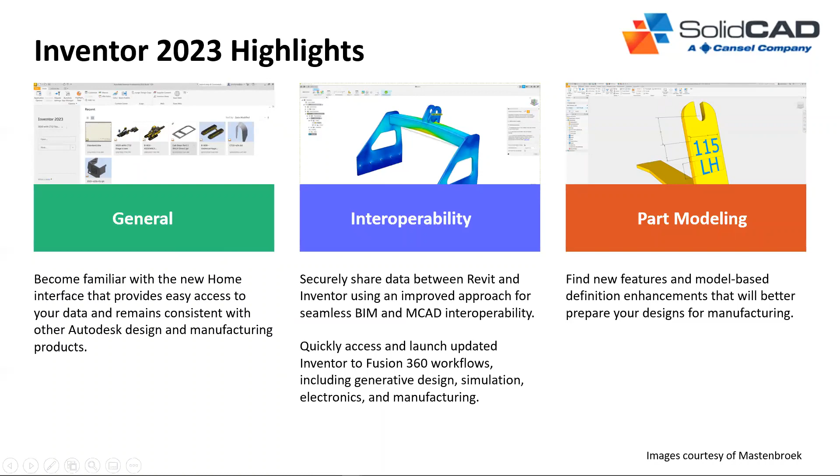Also inside the assembly modeling, you have a new, interesting tool: performance. It's always the goal of Autodesk Inventor to increase performance with each version, and that's a great help in 2023 too. I will end the Inventor side with documentation.

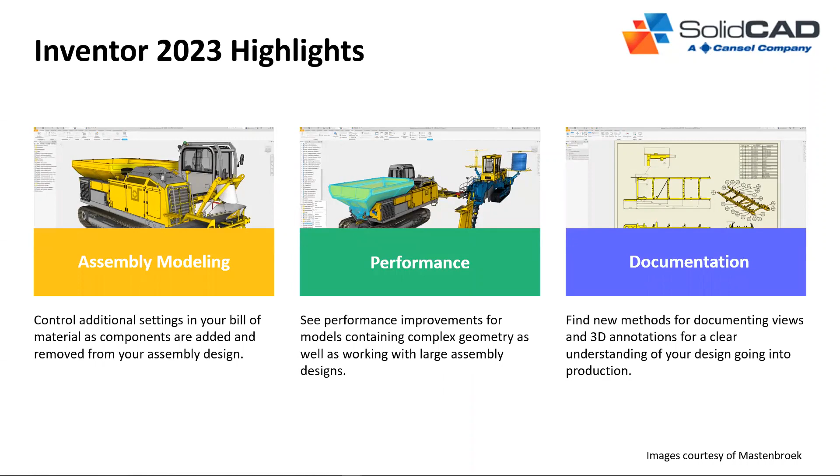In 2D drawings, you have a new tool and feature inside Inventor 2023. Let's go to the general enhancements. First, with 2023 you have a different Home tab, similar but divided into different sections. At the bottom left you see What's New and also tutorials, and the display will be different. It's just a brand new display.

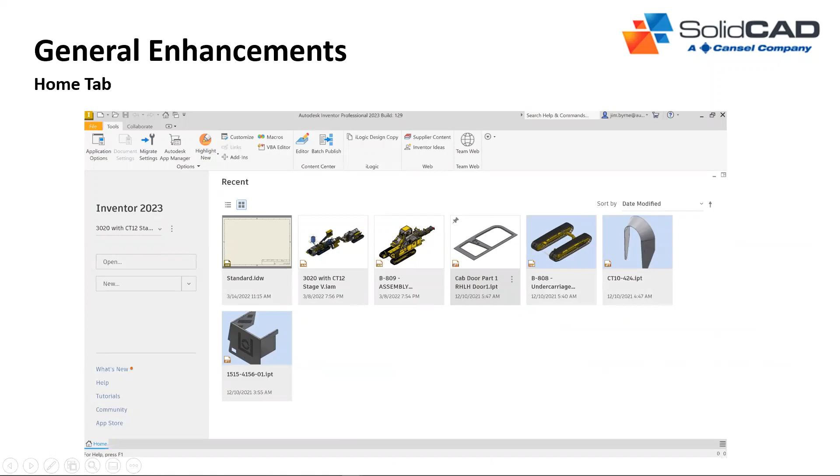One interesting thing inside the general enhancements with Inventor is the Shift and middle mouse button. In the previous version, you had new possibilities to configure your middle mouse button with the Alt key, and now you add the Shift key to configure this.

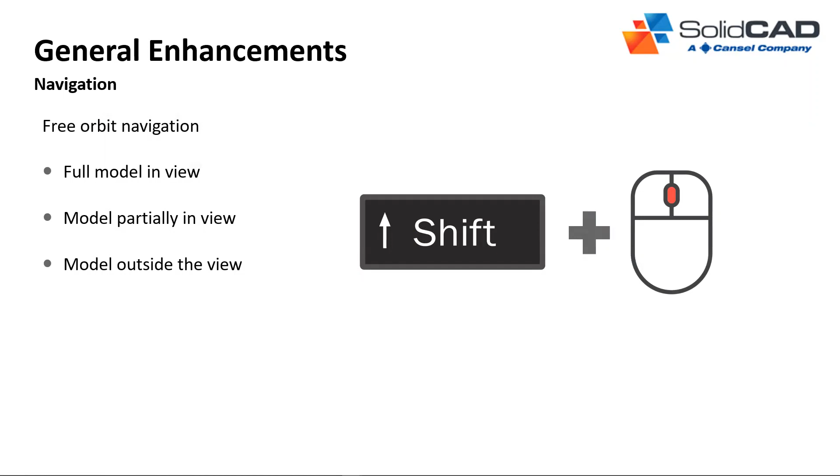Also a general enhancement with iLogic. If you are a user of iLogic, it's interesting that all external rules, and also global forms that are external too, now have access to add a new button inside your ribbon. So in Inventor customization, it's now easier to select an external iLogic rule or iLogic form to create a push button inside Inventor, which is interesting to add to your toolbar.

Also, if you use multi-value parameters inside Inventor, it's now possible to change the order — not just A to Z, but custom, manually changing the order of the parameter list. This is also interesting when you use it inside an iLogic form. New feature in 2023.

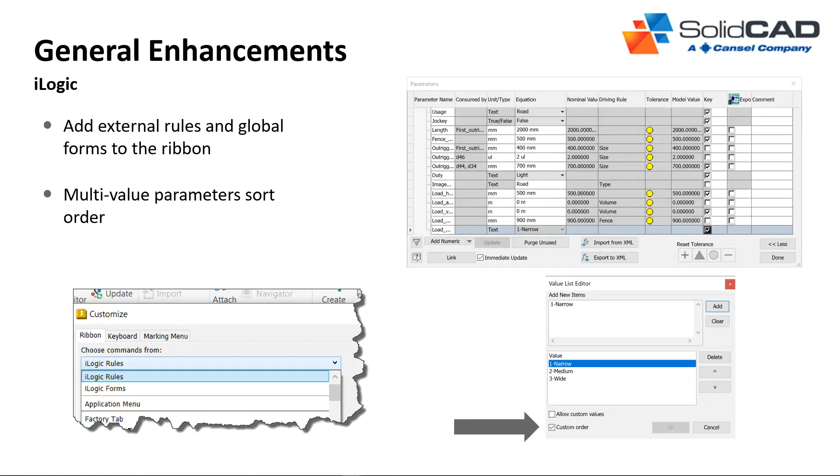Inside the general enhancements, if you have a mid or higher level graphic card, you'll be able to enable GPU ray tracing. This is new inside Inventor — instead of using your CPU, it uses the GPU, the graphics card processor. It's in pre-release in 2023. If your graphic card supports this feature, you'll be able to enable and try it.

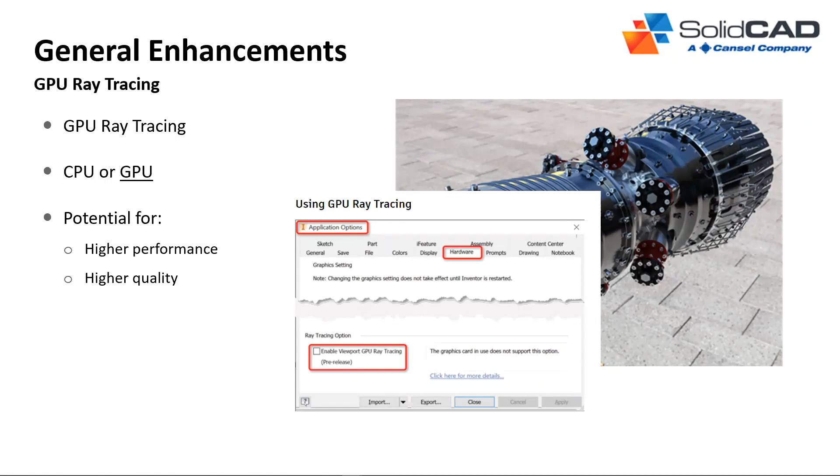So with different renderings, and also inside Inventor Studio, you'll have an improvement with the GPU if your graphic card supports this. It's pre-release for now, but you could try this.

Interoperability with different Autodesk platforms — I'll start first with Revit. Since 2021 and 2022, you could insert a Revit file inside Inventor. The problem is, hey, I received the file by email — you need an easier way to share than just sending the file.

With Revit, you now have access to the new Data Exchange cloud tool. So people using Revit can easily share a specific part of the building in the cloud, and update it as they add new sections or new walls. Inside Inventor, you'll be connected to that cloud file as a reference. If any change happens on the Revit side, it will be reflected inside Inventor without sending files back and forth.

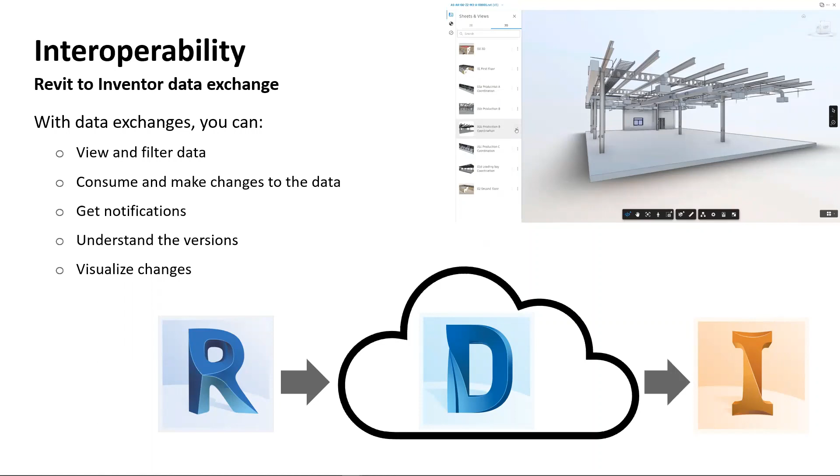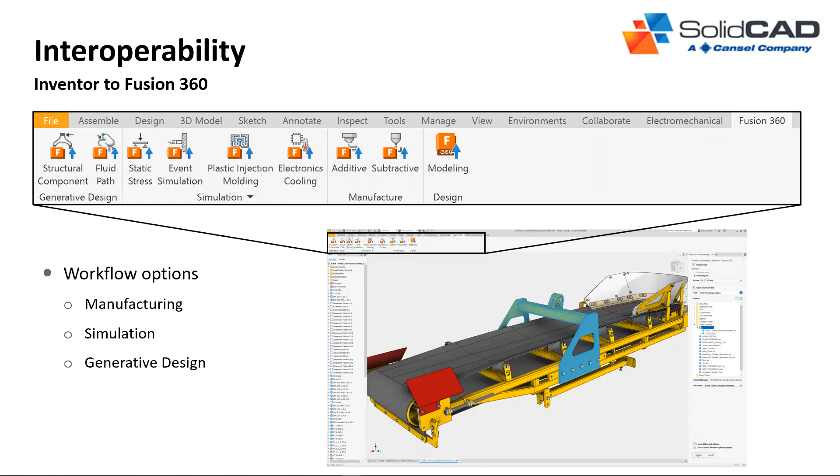Interesting, with Revit and also with Fusion. If you work with Inventor and have a collection, you also have access to the Fusion tool. Fusion is cloud-based software where you can easily use generative design, simulation, manufacturing, and design. So normally, if you need to create a simulation — for example, an event simulation like impact, or a stress analysis — it's now easier than ever to push this into the Fusion team without manually uploading the file. I'll show you a small video to explain this.

Also with Fusion, you could insert Fusion parts inside Inventor. Remember, inside Fusion you have access to other plugins developed by Autodesk, like circuit board design. You have the ability to create this inside Fusion, but importing it into Inventor sometimes means missing information. Now the mesh tool is available to import a Fusion design file inside Inventor, to be sure to retrieve all the info from the 3D model inside Inventor.

Also, interoperability, you could exchange different types of files. First, the new GLTF file, it's just an open source format, okay? And now it's available to export with Inventor. You have JT import export again, step file. The difference is just higher, it's more powerful now. If you import the step file, it's probably twice as fast now to import in 2023.

So STL export, and you also have the USDZ export. The USDZ is a tool for 3D reality. So if you export this package, it's also possible for other software to have a 3D reality view. It's also interesting to have batch export with the task scheduler inside Inventor, so you could massively export with GLTF, step file, or USDZ.

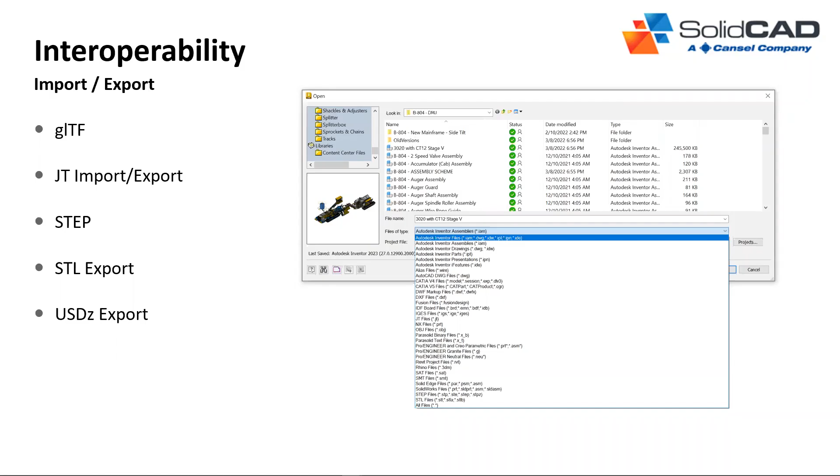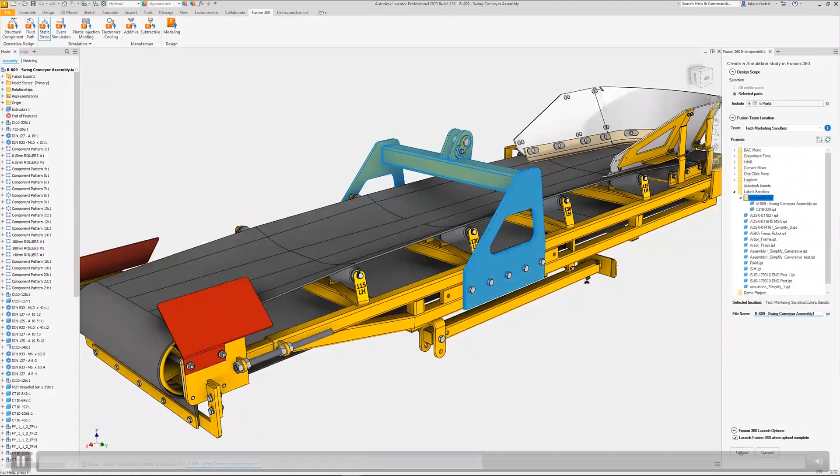So let me show you a small video with the new feature. You will see inside Inventor with the Fusion tool. First, if you open an assembly or a file or a part, you will be able to share this with the Fusion tab. So inside Inventor, you have access to the Fusion tool, and you have different options like simulation, manufacturer, and you will be able to share this directly from Inventor inside the new panel link with your Fusion Team Hub. You will be able to access your specific project just to share this info inside the cloud to process the information inside Fusion.

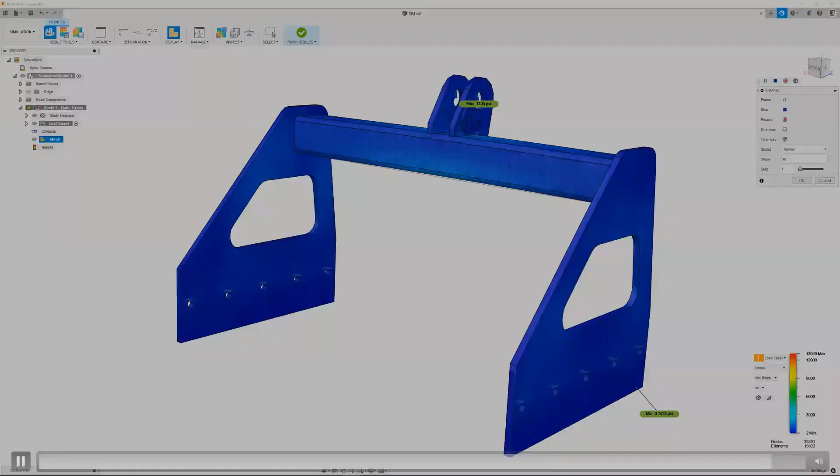So for example here, I would just push the sub-assembly, and inside Fusion I will be able to create this study like stress analysis and impact, and use the Fusion process and Fusion compute on the cloud just to be sure to have the correct result, and pretty faster because it uses the cloud process for Fusion. So it's interesting with Inventor to have access to this new panel.

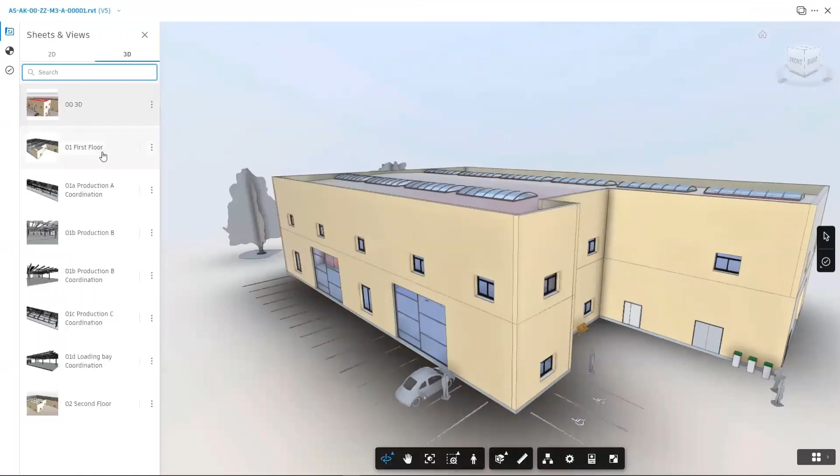And also for Revit, if you start with Revit and you need to share info, the Revit user will be able to specify what type of view they need to share. Normally they don't share the entire building, they will share a specific part. And now with the new data exchange, they will be able to directly share this on the cloud. And you could have inside Inventor the preview of this, and the data exchange is also embedded inside Inventor to insert the cloud file inside Inventor.

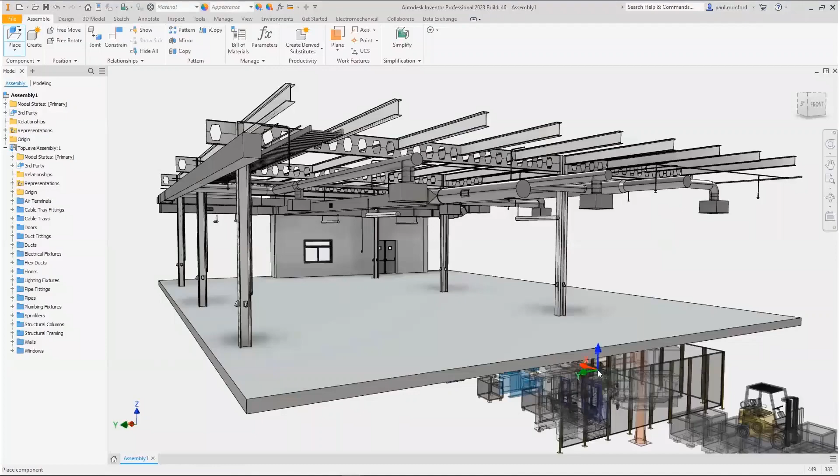So this file provided from the cloud, and this one will provide from my Vault or my site, and I will be able to collaborate with Revit and be sure to have one single file on the cloud to share.

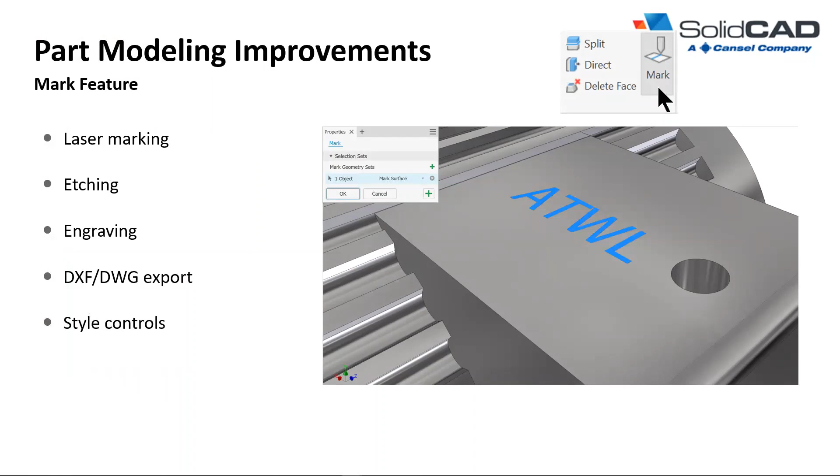So now the next topic is part modeling enhancements. You have some features, one is very interesting: the mark feature. In sheet metal mode, it's interesting because if you need to have a scribe inside your laser cut, and you need to export the scribe on a specific layer inside the DXF, it's now available in 2023. So the DXF export will include a specific layer for the mark tool. It's possible for any type of part, but personally I like this in sheet metal.

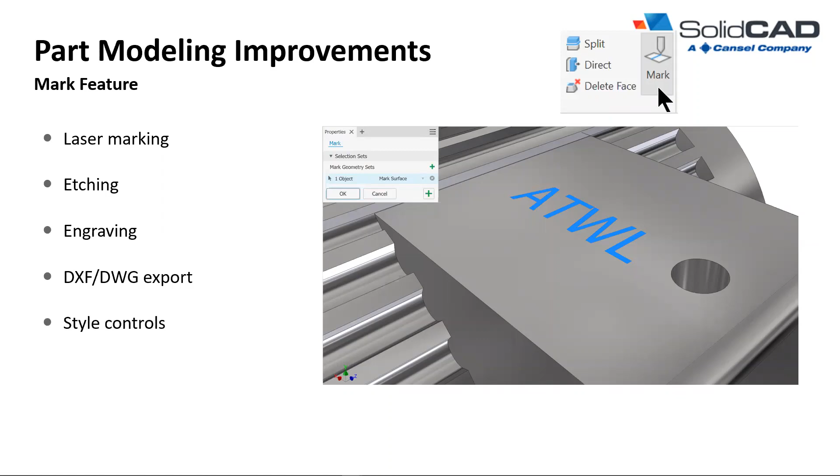You will see later also other tools linked with this new tool about properties, I will talk about later. Other improvement inside the part: if you have a broken projection like a sketch provided from another part, and you have a missing link, it's now easier for you to find and select the broken projection and delete this or break the link, and be sure to find this easier than the previous version.

Now, iProperties in text. Remember I talked just before about the marking tool. iProperties in text is interesting because you could integrate your iProperties from part number inside text. So if the part number, description, or custom parameters, you are able to insert this inside the text. And if you have a change, they will be able to change this. In the past, the only way was to use iLogic and push the iLogic text inside the parameters.

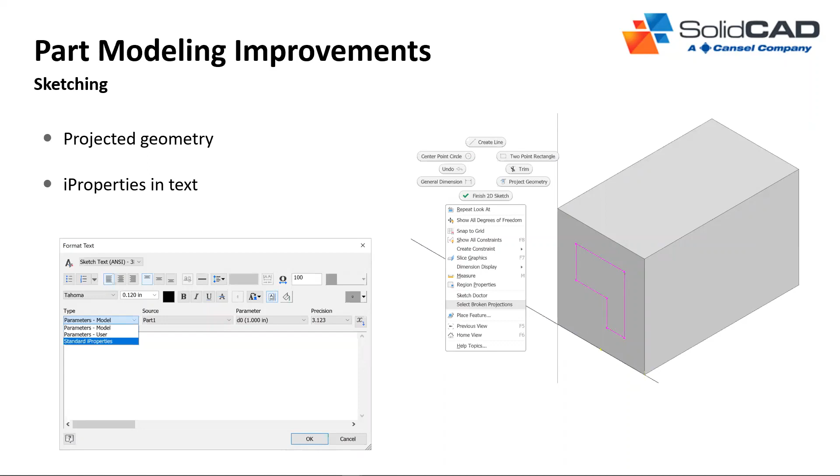It's just easier now. Again, inside the sheet metal part, it's interesting to know about the extended information. Probably you already saw this inside Inventor with the part, the standard part. You are able to see a better description of what is the face size and what is the thickness. It's now available in sheet metal mode too.

If you have a contour flange, an extrusion was only possible in two directions or middle, now it's possible with asymmetric extrusion for the contour flange. If you export the DXF file from the flat pattern, it's now possible to replace spline not by line, but by arcs. It's interesting because if you have an export with the DXF for your laser cut, it's easier, and arcs give a better job than multiple lines.

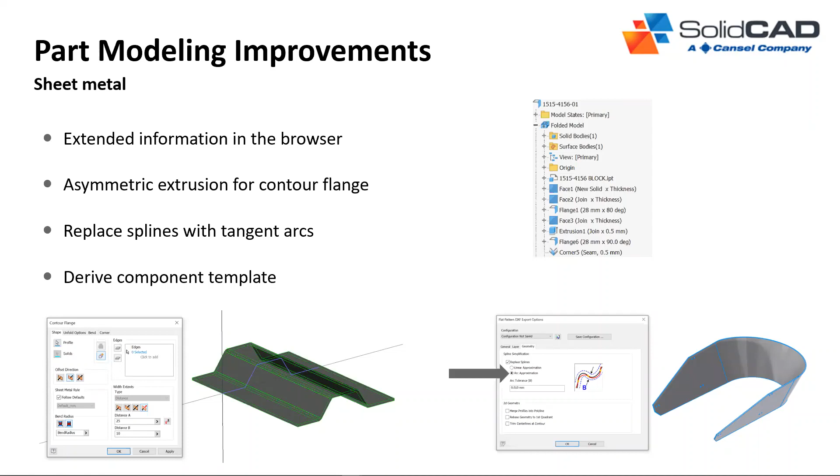Also, derive component is easier now to derive like a template. So if you create a sheet metal and need to reuse this for the same part, it's easier now to derive - like creating a mirror part inside an assembly, directly from the sheet metal, create a new one, and link it to the previous one.

Also inside the parts modeling improvement, when you create a fillet or also extrude, revolve, or each 3D feature now, you could easily access the tolerance tool. If you need to add tolerance during the extrusion, for example, it's available now. In the past, the only way was to enter the new parameters, go back in the tab and add tolerance. So it's now available directly on the screen.

The other tool is relationship with feature. You probably tried this in Inventor - right click and see where this feature is used. If you have a suppressed feature, it was just unavailable. Now suppress is also supported, to understand if you delete a feature, what is the impact of this feature. This tool existed for a long time, but it was just unavailable with suppress.

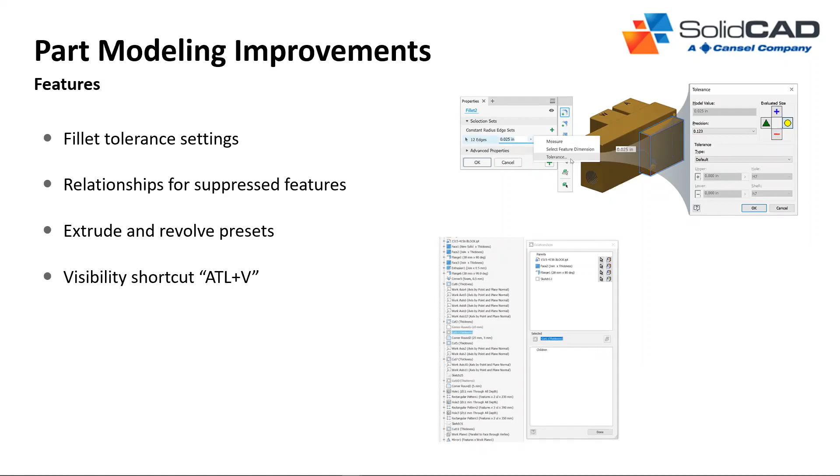You probably also use right-click to turn on or off your sketch, work plane, work axis, and also multi-solids. Now use Alt V instead - just click the sketch, Alt V turns it on or off, instead of right-click and turn on/off. So it's an interesting shortcut for you, ready to use with 2023.

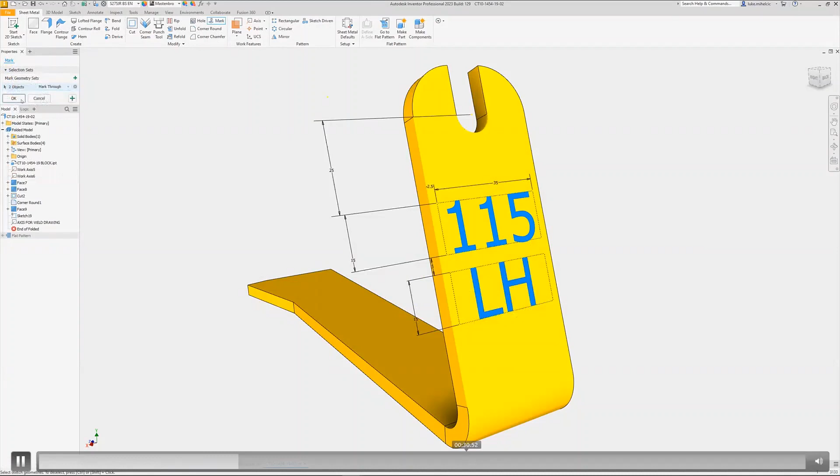So now, again, a small video just to explain the different tools inside the parts. First, if you open a part like a sheet metal and aren't used to the scribe or mark tool, you could use text or sketch, and you're able to use mark from one side or two sides at the same time.

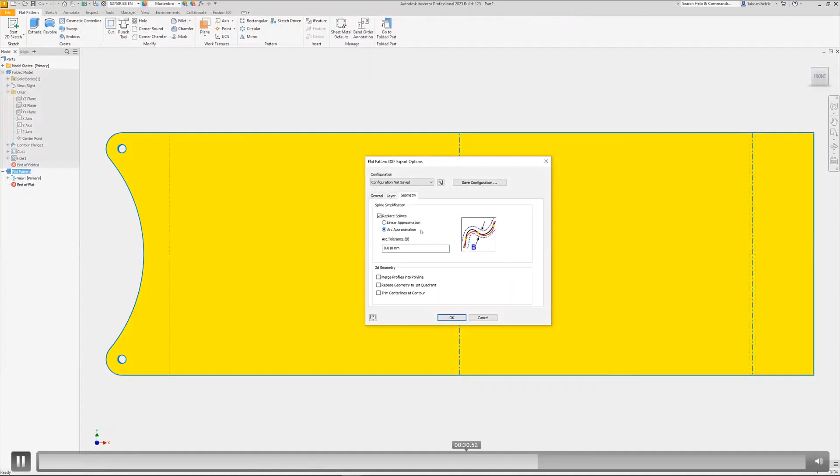Also, the extrusion could be asymmetric now for the contour flange tool. And if you have a flat pattern with DXF, now during the save you see the new arc approximation tool to be sure to resolve your spline with arc. If you create extrusion or fillets, you're able now to add directly inside the box your tolerance and also recover this tolerance inside a 3D annotation if needed. So just small tools, but very interesting in 2023.

Now the second part of Inventor is the assembly modeling enhancement. Inside the assembly, first I would talk about 2022. Remember, Autodesk changed - in the whole time when you suppress to create a new LOD, level of detail. Since 2022, you create a new model state that impacts the BOM. The problem with 2022 is if you use this, you suppress, and the quantity is 0.

Now with 2023, you have access to the small BOM settings tool and you could hide parts with 0. Suppress - please don't show this part. And also, when you suppress the part, the problem is because inside your structure or part only you have an item number.

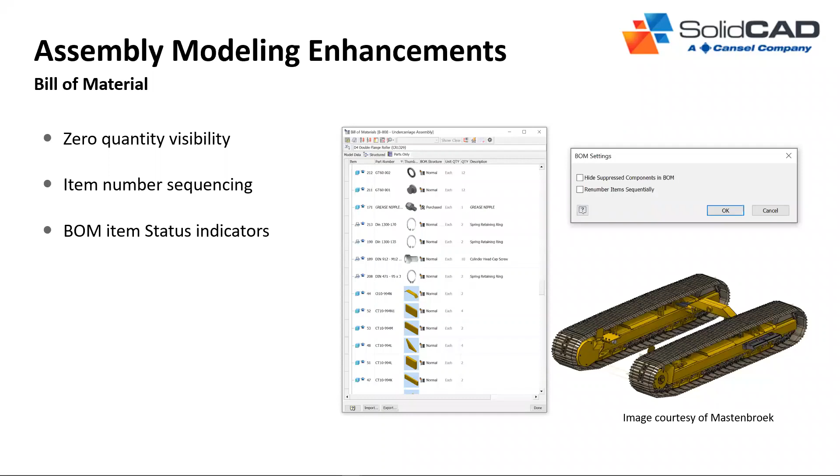The item number could now be renumbered instantly with this option. If you check renumber item sequentially, for example if you have items 1, 2, 3, 4, 5, and you suppress number 4, it becomes 1, 2, 3, 5 - now it's 1, 2, 3, 4. It's just interactive and easier than ever to manage your item number if you suppress a part. So interesting for the BOM, and also because you could use the model state to suppress different options.

And when you use not suppression, but if you remember the shrink wrap tool in the past, it's now the simplified tool. It's now just easier to right click and use the simplify. This is the whole shrink wrap to create a new model state linked with the new simplify, the old shrink wrap. It's already done in 2022, it's just easier in 2023.

The constraint options have a new tool. It's strange because you could create the constraint and suppress at the same time. Why?

Because you work inside an assembly and you know this is the level of detail, now the model state, and I just don't need this in this context. So you could create this, but suppress during the creation to be sure to not have this feature or constraint activated when you finish the job.

It's also possible inside the IPN, so the presentation file, to rename a storyboard. It's a little change, but in the past it was impossible to rename the storyboard. So very simple, but a new feature. And also if you use Publish to create a video from your IPN view, you can change the video frame rate. The video frame rate is new, to have better quality; if during 1 second I need 30 images, for example, it's possible.

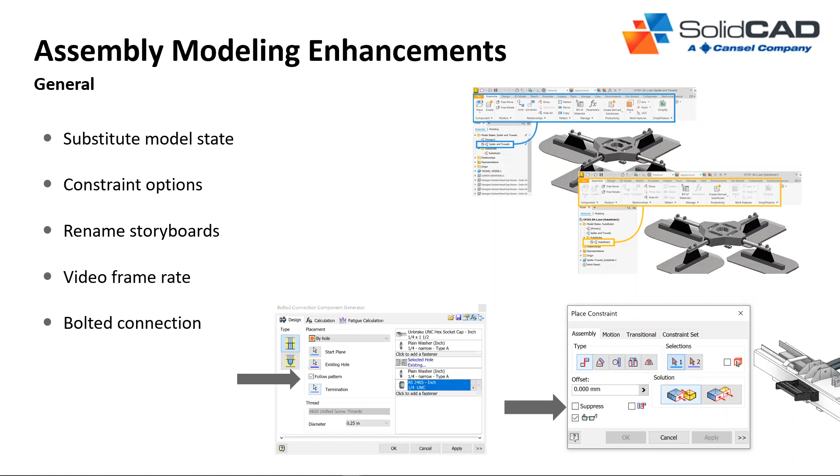The bolt connection also has a new tool. If you create a bolt connection, you could connect with the actual pattern inside the file. Now, if you check follow pattern during the bolt connection, it will follow the pattern, but also the sketch pattern, okay? If you tried this in the past with a sketch pattern, it was impossible to link this. It's now possible in 2023.

Inside the assembly, like the parts, it's easier to connect iProperties from different parts or different instances. So basically, if you create a note inside your assembly, like a 3D annotation, you would like to have specific info like a description from the part, or also an instance property, because you could link this inside the text and keep it updated. The goal is to keep the information in one place and distribute this info to all other tools like the text.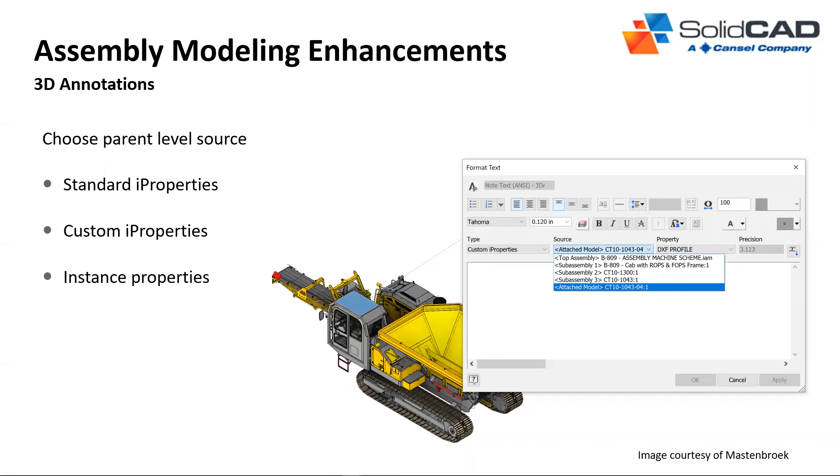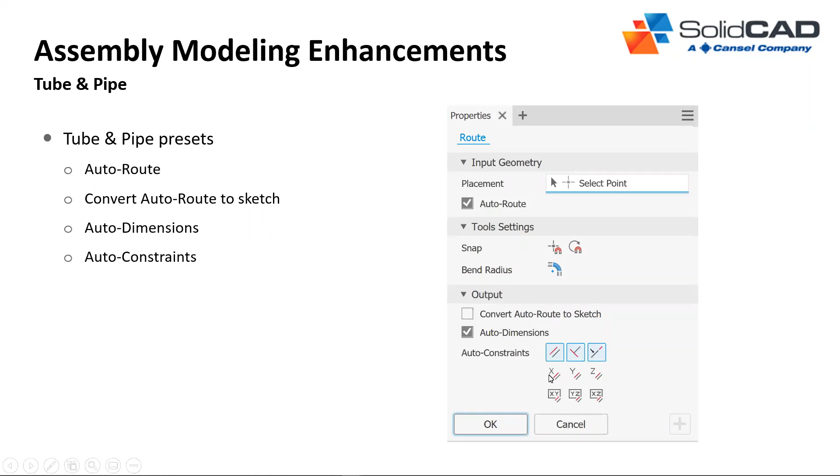Also, during the constraint, basically the three first were enabled, and when you go back inside your sketch, you see it's not parallel to XY or YZ. Now you could enable, during my sketch, all of these possibilities to be sure that all constraints will be applied at the same time.

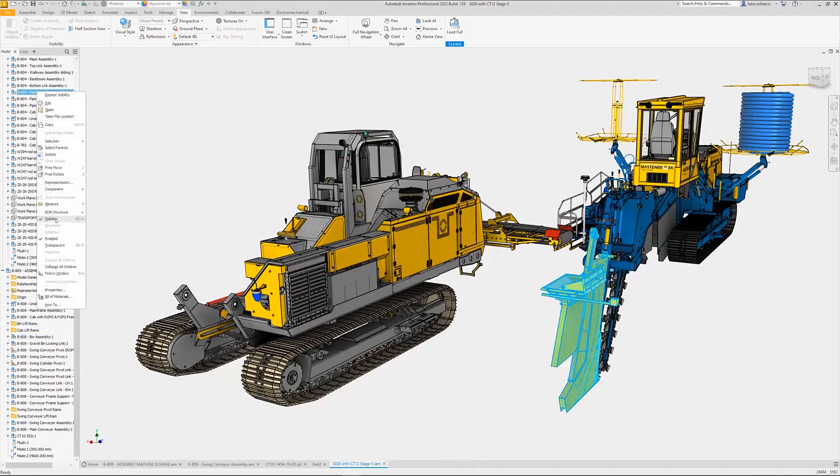Again, a small video just to explain some new features in assembly with Inventor 2023. First, if you go in express mode and turn visibility on and off, it's very fast in express mode, okay? It's very interesting, it's easier. Also, if you use the suppress command inside the BOM, and I don't need to show zero quantity, you access the BOM settings and suppress the zero quantity.

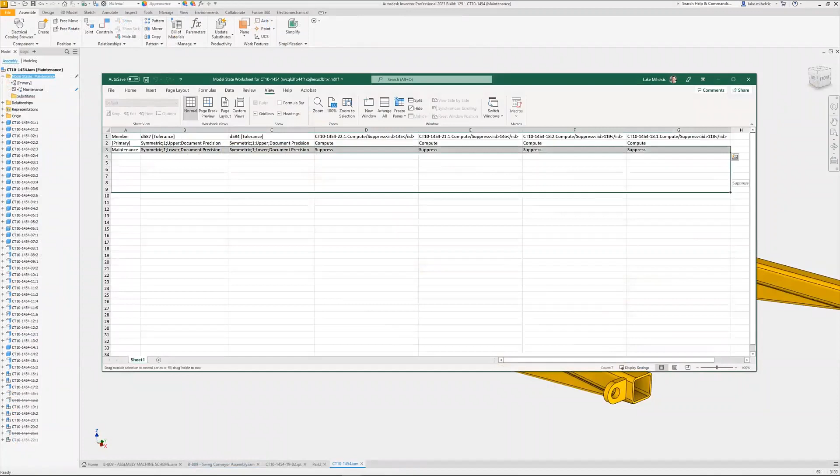Also, inside the spreadsheet of the model state, you are able to check the tolerances inside your part. So you could easily now drive the constraints and tolerances inside each level of detail, now model state. Different model state, different tolerance, you could drive the tolerance too. It's brand new in 2023.

So now the next is performance and improvement with Inventor. Now the express mode is just better than 2022. Each year, Inventor increases the performance of the software. You could have multiple thread cores on your CPU, so now they use more threads just to compute display. That's why Inventor with large assemblies is faster than 2022.

Okay. Also, if you use the punch tool feature inside sheet metal, if you have a lot of punch marks, okay, it's twice as fast inside Inventor than in 2022. So it's an improvement for the punch tool, but also for the display.

Also, Hugo, yeah, I think that punch tool feature, because we had a discussion a while ago about a customer that was using SolidWorks, and apparently it was a nightmare for them, for instance, for ventilation holes inside a cabinet, to have 40 by 50 holes in the sheet metal, and you were showing me something that was fantastic. So yeah, I believe that has been greatly enhanced. Yeah, sure.

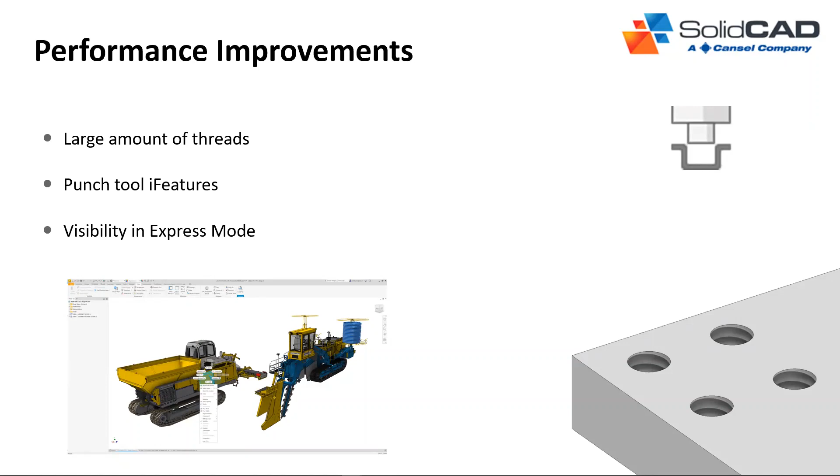Then the last slide for Inventor is documentation, the 2D drawings, okay? You know, when you use model state, you don't use positional representations. When you create drawings, it was possible to use an overlay view to have a superposition with different positions, okay? Now it's available with model state. If you create a model state, it could be used also for a part, for example with a different length of the part. You could use an overlay view to just overlay different model states, like the positional view inside Inventor.

Also, the edit detail. If you create a detail like a square or circle, I don't know why, but in the previous version you needed to go in the browser, right-click, go in the options, and try to change this. Now it's just double-click on the detail view. That's it. You access this box, and you are able to switch to square instead of circle, change the cutout shape and add the connection line. All is easier in 2023.

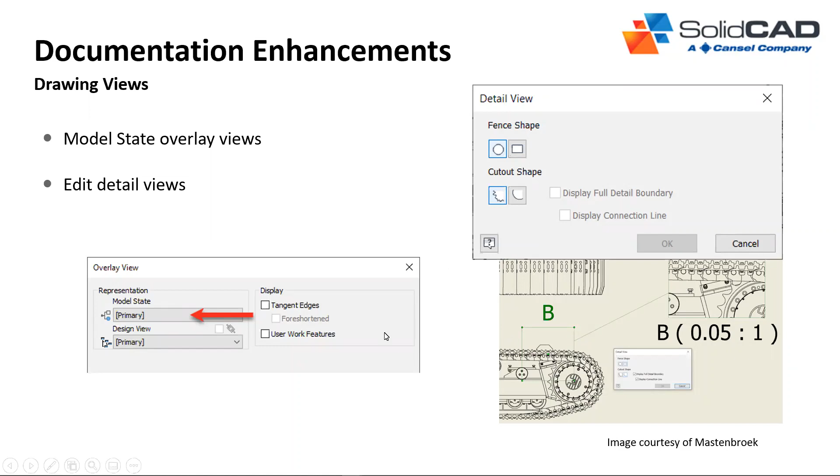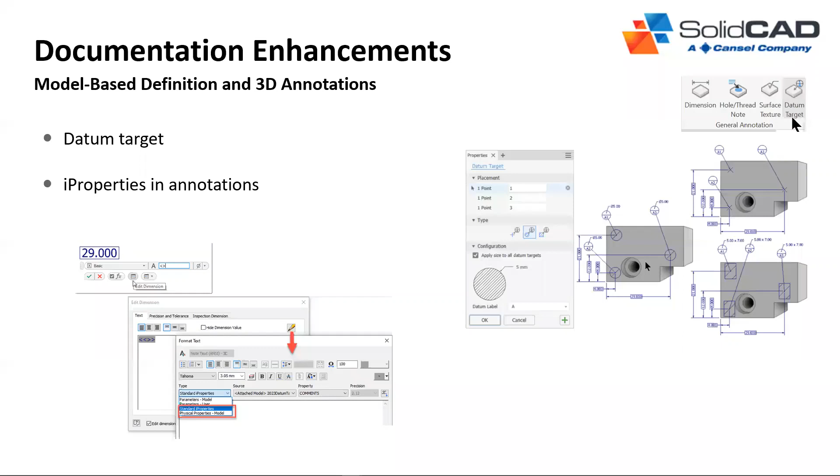Also, if you create a datum target, if you create 3D annotation, remember, iProperties are now back in text, so you could link your iProperties inside the text, inside the 3D annotations. Best way to centralize your information, always in your iProperties, okay? So it's brand new in 2023, and also datum target uses 3 different types of shape now. It's easier also to make a link with different features.

And also for the weld annotation, you know, you have a style library with the weld. Now there are new options inside the weld, you have a new symbol, okay? You have the new ISO 2553-2019, it's now available. You have some new ISO models, and Inventor upgraded the possibilities of the welding symbol, and also has a new feature like enforce to be automatic, fixed left or fixed right. You could enforce the right or left side for your welding annotation now. Okay.

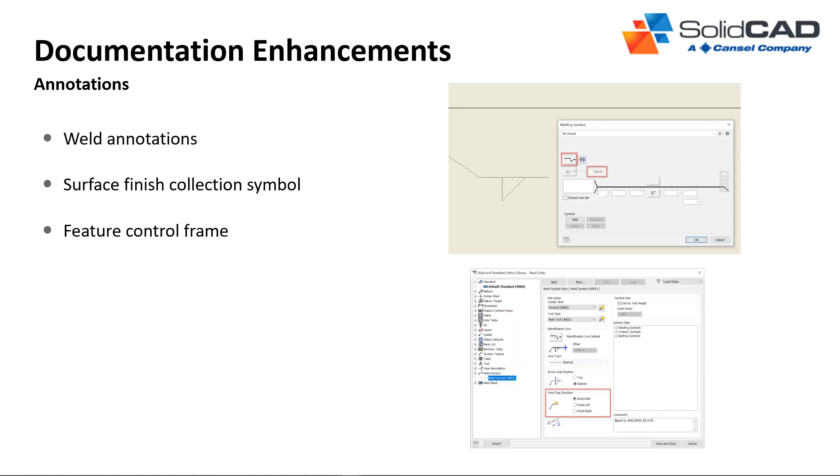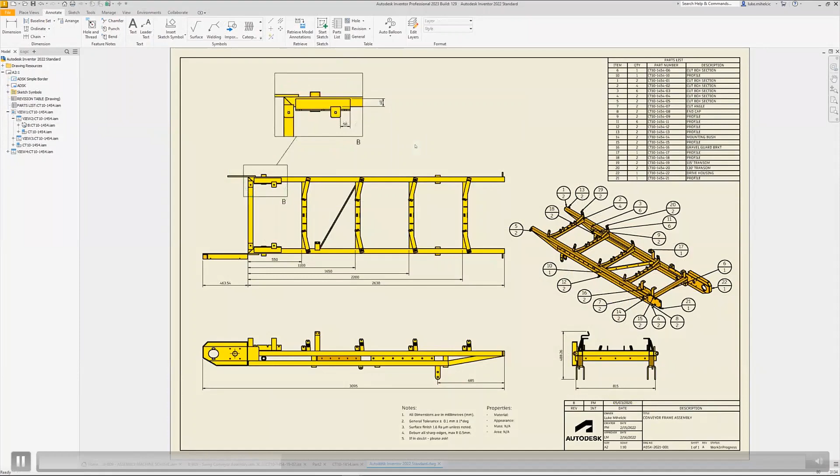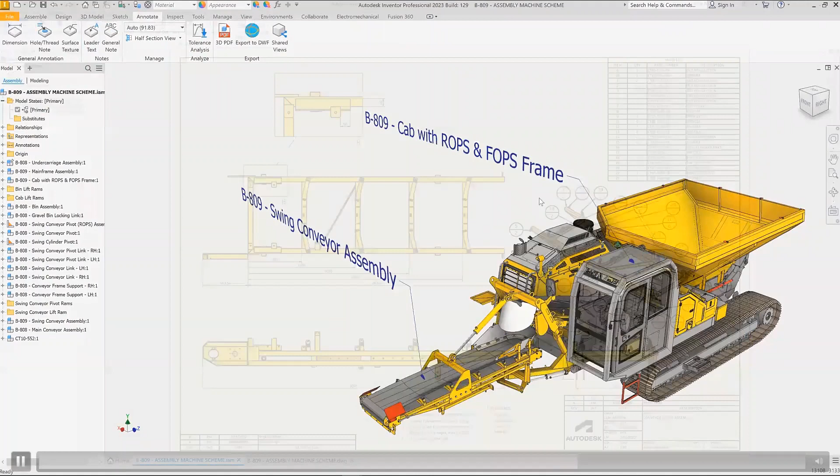Okay, so now a small video again, just to explain the new documentation improvements. If you go inside your drawings, for an assembly or part, you are able, for example, to edit the detail view, double-click and access square instead of circle, add the connection line. Inside the 3D annotation, the datum target, you'll be able to change the shape and also link directly to the specific extrusion or other face. And again, notes could be linked with iProperties to be sure to populate your information from the iProperties.

You could also copy-paste the revision table. Sometimes you have 2 or 3 sheets and you insert the revision table on the first sheet. You need this info on the other sheets, just copy-paste. It's possible in 2023.

Again, with the documentation enhancement, sorry about this, I think I restarted the same one because the next is Vault. That's why I hit this. So again, the new features in Vault now. So that concludes the first section with Inventor.

And with Vault 2023, you have some new features, okay? First, you have the user side. If you use AutoCAD, you have a big upgrade from the previous version. If you use Inventor, it's the same, okay? Inside AutoCAD, you have a new feature I will explain later.

If you are an administrator of Vault and use Vault Pro, not Vault Basic, okay, you are able to connect remote users more easily than with VPN access normally. You could use the new technology now with the Vault Gateway. And also for participants, if you annotate or add info inside your Vault Pro, like your ECO, you have a new tool to annotate and document your files. So let me show you the others first.

This is the focus inside your work, inside AutoCAD, also inside Vault. So first, instance properties, okay? If you work with Inventor, you could, since 2022, add specific properties for each instance inside your assembly. You could have exactly the same part, but different information.

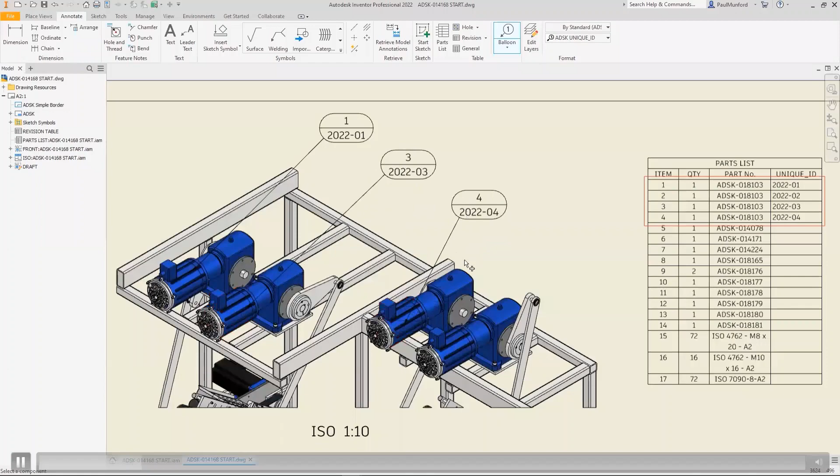Now with Vault Professional, if you create items from the assembly, you can also have specific info for each instance brought back inside the item, inside your BOM. So just to be sure, instance is also supported now at item level if you use items inside the Vault. So let me start with the instance property. You could have different assemblies with different information, but it's the same assembly. This feature was done in 2022.

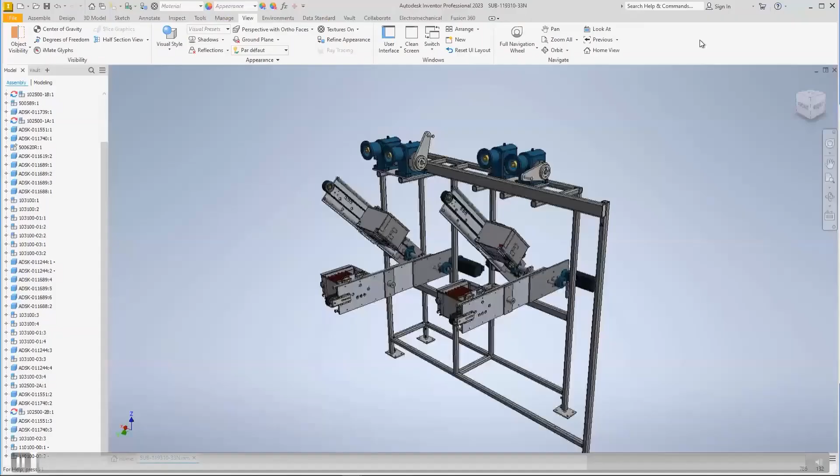So if you have different IDs inside your BOM, inside the Vault you are now able to create new properties linked to the BOM and provide from the BOM information to the item with instance properties. You can map this, and when you create items inside the Vault, you will have exactly the same info as your BOM inside Inventor. So you see here, I have a BOM with different instance properties inside Vault Professional.

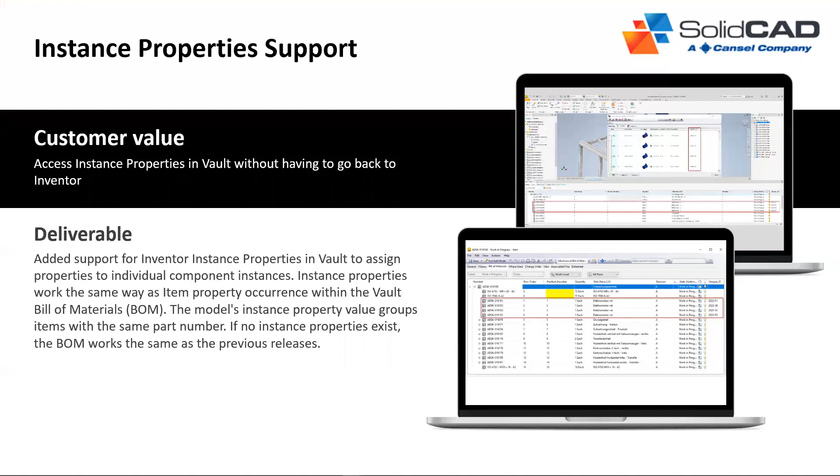With AutoCAD, if you know Inventor, it's the same. So you go inside AutoCAD, you can use the history, detail view, where used tab, and also you see you can start a copy design, go to Vault folder. All these tools were available previously in Inventor and are now available inside AutoCAD too. So you see inside AutoCAD again, the options to use the interface exactly like Inventor.

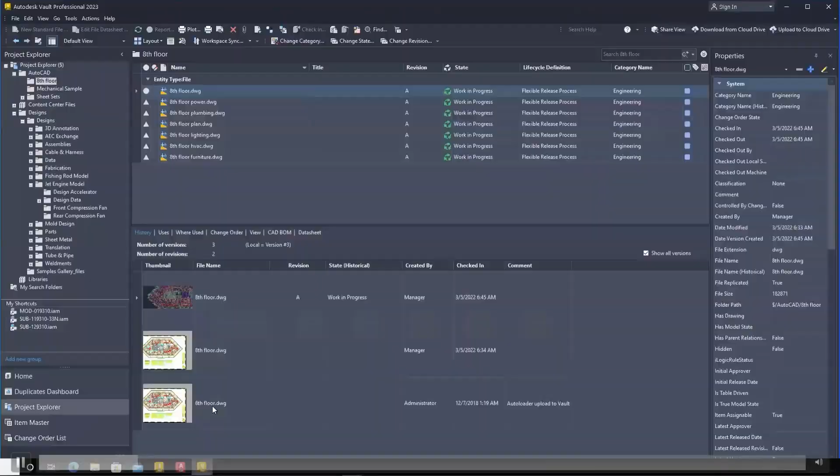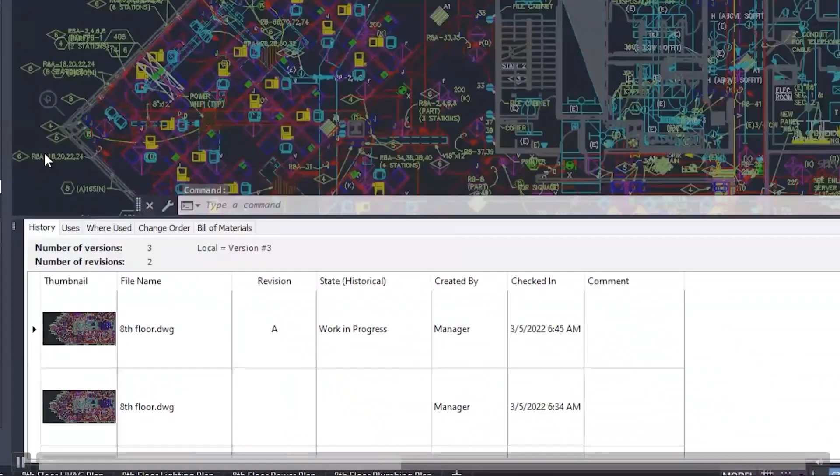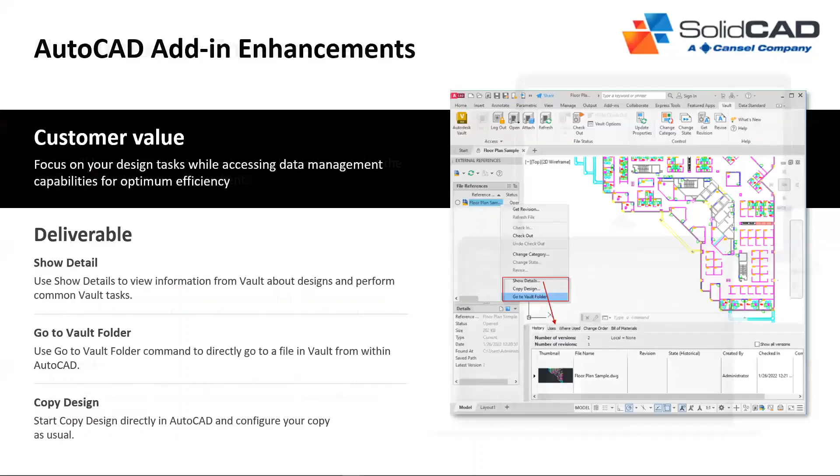So if you go inside AutoCAD, you will be able to use the new panels like history, uses, where used, and right-click and access the info directly. So right-click, show details, you will see the information like in Inventor. If you need to go to a specific folder in the Vault, you can right-click and go to folder, go to item inside the Vault, and simply access the info inside the Vault. So it's interesting to have exactly the same options. AutoCAD and Inventor work with the same tools now with Vault Professional.

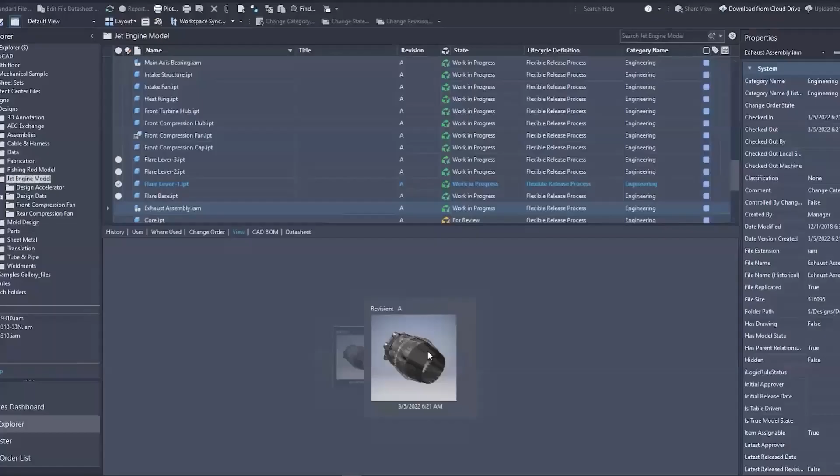Also, user interface enhancements. You know you have different themes inside Inventor, like dark or light gray. It's the same now with Vault. You can change it like this, so gray or dark. And also we have refreshed icons. You will also see in the small video some changes in the display.

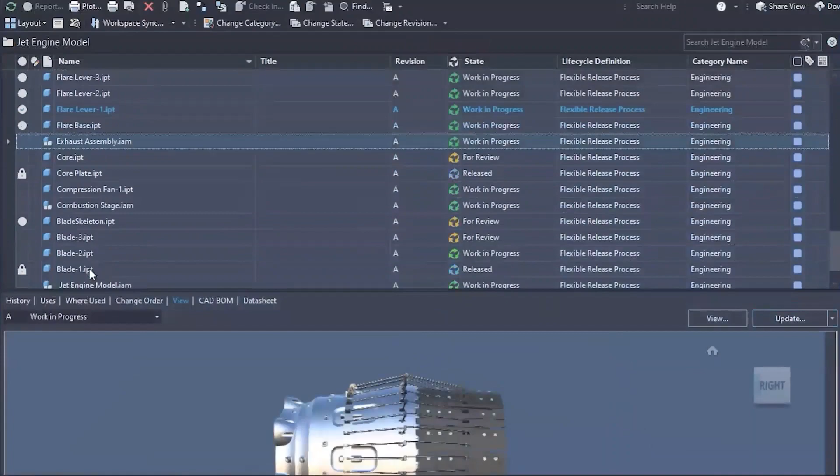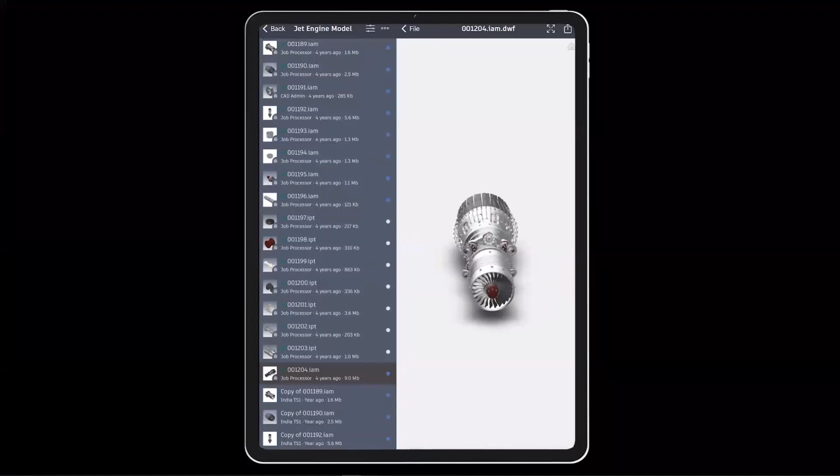You see you can use inside your Vault Professional the web-based plugin to show your viewer. So I talked here about the dark mode, but you can change this also on the user side from the web application. The Autodesk Forge viewer is also embedded inside Vault. So if you use the web application or the Inventor side with the Vault, you have exactly the same information because you use the same viewer.

In the past, inside Vault, you needed to use the DWF file and not the digital viewer, but the Design Review tool. So without the Design Review tool, it was impossible to see the file. So now you have a choice to switch to cloud-based to have the same options on Windows and on tablets like iOS or Android.

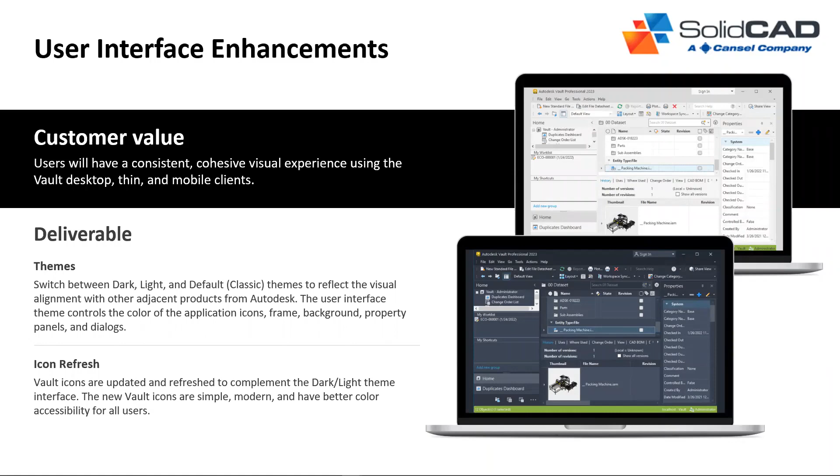Column customization is also available if you use Vault Professional and the change state tool. If you change state, you may also need to display different information. You can now add with a customized view your specific columns like material, file name. Anyway, you have access to customize your view.

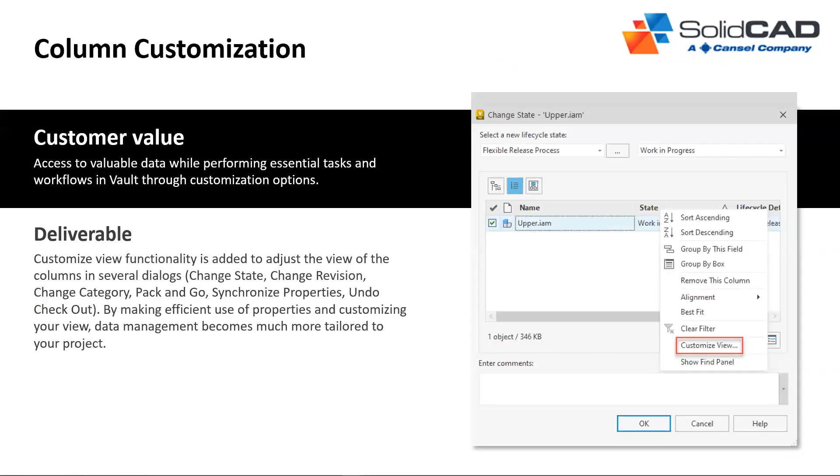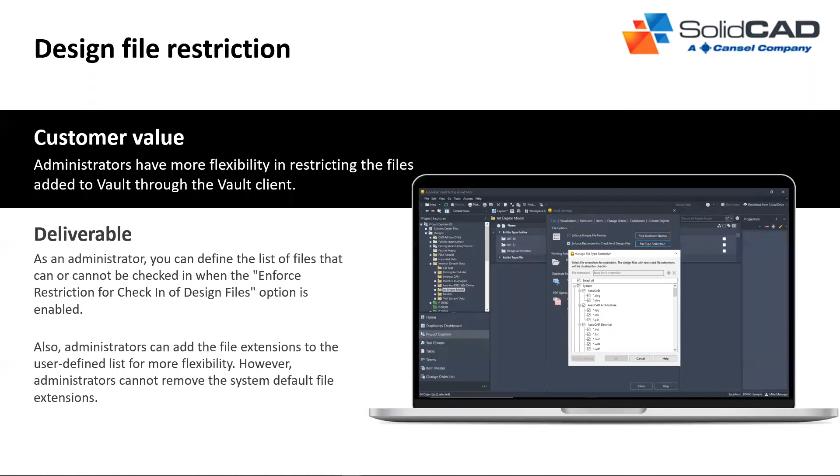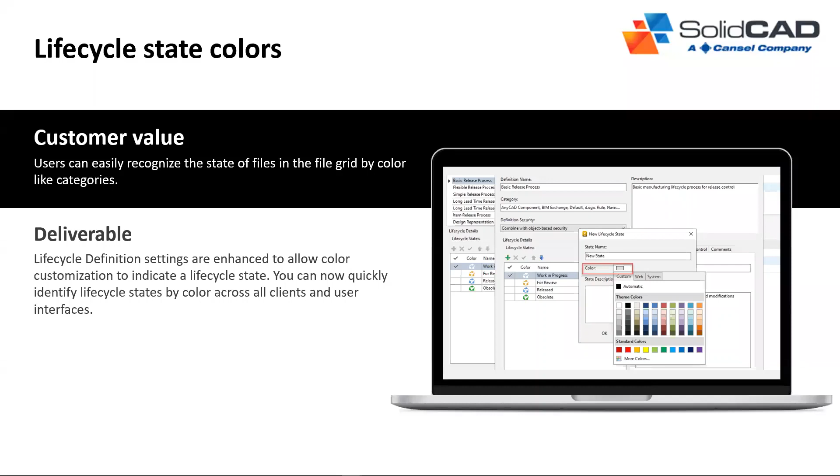Also, on the administrator side, you can change the color of your lifecycle. Interesting because you can have different lifecycles. The best way is just to see the color. So you could have, for example, in this case, work in progress in white and released in blue. So I can use this color for each release and each type of lifecycle now. So blue is released, white is work in progress. So it's a new column, new properties available in 2023.

And also Vault Gateway. I explain this because normally people work at home and need to connect to the office with the Vault server.

They need a VPN account, the VPN connection, and also in this case, normally need a domain account. So now with 2023, you could use the Vault Gateway. It just works in the background of the firewall without VPN access, okay?

It's just easier to connect to the Vault, but to do this, you have some setup to do on the server side because it's managed by the Autodesk licensing on the cloud. If you don't have a license, it's impossible to access, okay?

You absolutely need a Vault license like a Vault Pro to be able to connect to the Vault, and your license administrator needs to specify the group of people that access the Vault with your Autodesk ID. So they use the Autodesk ID to connect to the Vault to use the check-in, check-out inside the Vault.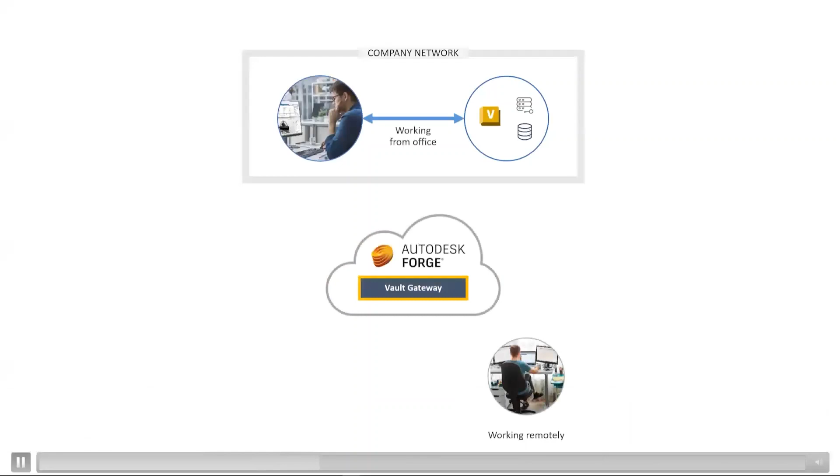Very interesting, and also it's just an easier and faster way to connect to the Vault with remote connection. So you will see in a small video how to connect without VPN. So you could now use the Autodesk Vault Gateway and simply configure the server and give access to people with iPad, iOS, and other platforms without VPN, okay? It's a secure connection with Autodesk and behind the firewall, and you could access easily without VPN.

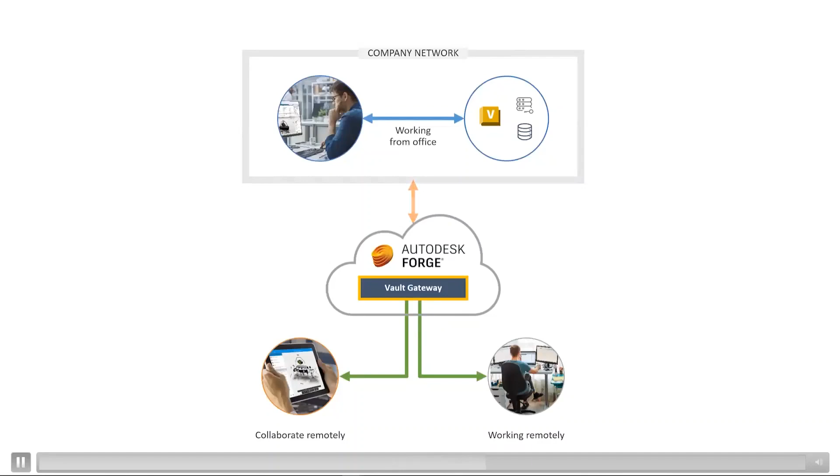So I will show you on the server side now the small setup. You need to simply go on the server and create a Vault Gateway setup. So manage Vault Gateway, and in this case, they will create with your Autodesk account administrator a secure connection with the server and add users to be able to connect to this server now without VPN.

It's interesting in 2023. So you need Vault 2023 server to do this. I think, I'm not sure, but I think if you have a 2023 server side and use 2022, you are able to use Vault Gateway, okay? But you absolutely need to move to a 2023 server to be able to set this up.

Okay, so Vault Basic now is also available with different Autodesk software. So, you know, Inventor Professional includes Vault Basic, 3ds Max now, AutoCAD, and also each collection like product design, architecture, media collection includes Vault Basic, okay? So in the past, only collections included Vault Basic. So now single licenses like AutoCAD, 3ds Max, and Inventor include this tool. So Vault Basic is available for all now.

And just to conclude now for the participant side with Vault, if you need to collaborate, add annotation. Remember, in the past, people needed Autodesk Design Review to add annotation. So if you have an iPad, iOS, and access to the Vault, you now have access to the cloud viewer based on Forge. So you are able now to add annotation inside the cloud related to the Vault. It's interesting because you could add annotation with the cloud tool.

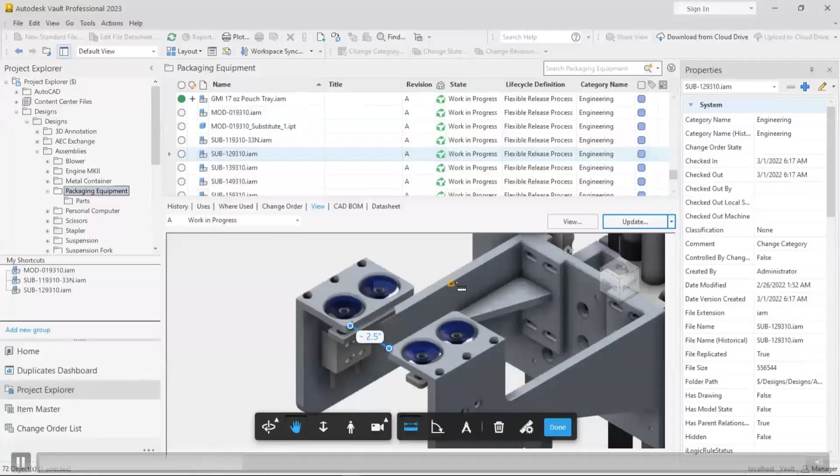So let me show you the markup tool with Vault Professional in this case. So they will be able to access with different platforms, Windows, iOS, or Apple, but also Android. So your annotation could be done directly on the cloud viewer, and you could create a snapshot here and link it with the Vault. You could also delete, rename the annotation, and also save this like a file. So you could save as data or a screenshot.

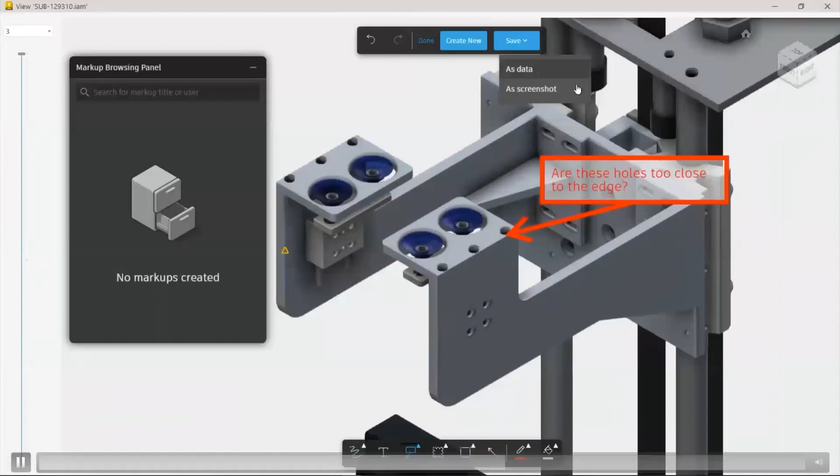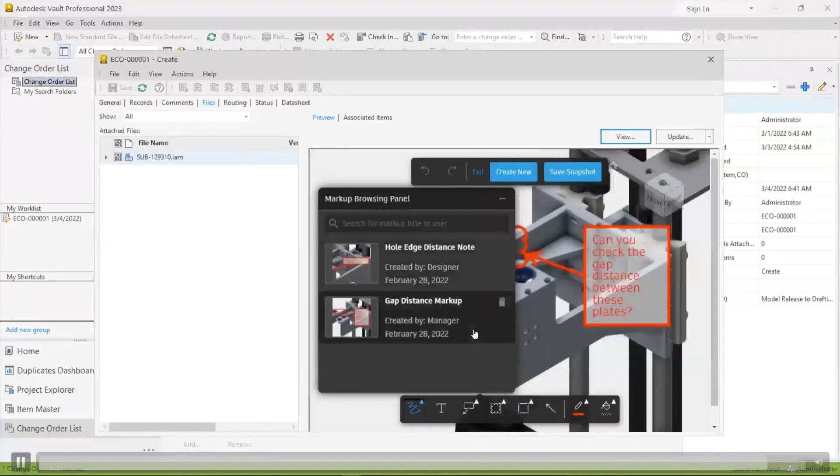So if you save as data, there will be a link inside the Vault, and you will be able to consult this with the Vault client side. So interesting, just to markup a file without having specific software, just use Forge Viewer, easier to annotate and see other markups done by other users inside the ECO or other files. So interesting now, you don't need a specific platform to do this. That's why it's very interesting.

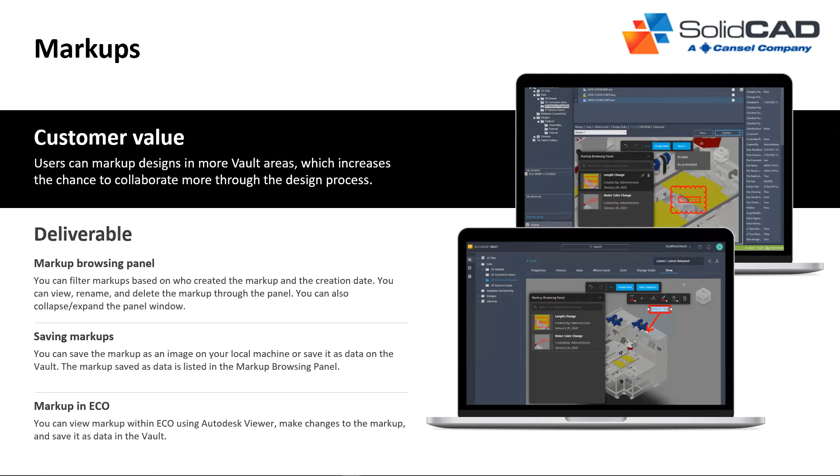Also, Inventor read-only, probably you know that Inventor read-only is included for you. So anyone on the planet could download Inventor for 30 days, okay? 30 days is just a trial. It's a full trial. After 30 days it's read-only mode. So Inventor could open native files, just without performing edits. You could take measurements, access the BOM, but read-only Inventor is free, okay?

So if you have Vault Office installed on different computers in your business, you now have access to open the file from Inventor in Inventor read-only mode, instead of using Inventor View or other software. So it's interesting to change this workflow so that each time I double click inside my Vault, I open this in the native software, Inventor read-only, okay? So it's available in 2022 with the latest server spec, so it's also available with 2023.